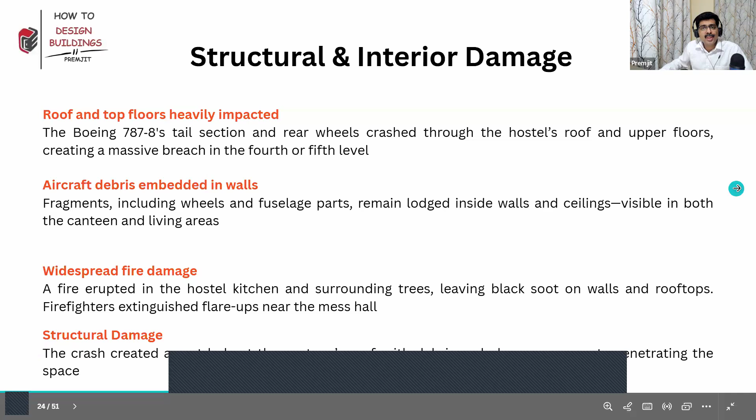There was widespread fire damage, and there were structural damages as well, but there was no disproportionate collapse. Okay. Now, summary is that it was an unfortunate accident. However, building performance was not very bad. There was no disproportionate collapse. Main structural members have not collapsed. There is no total collapse, but crash impact is huge, so walls have collapsed and fire did a lot of damage.

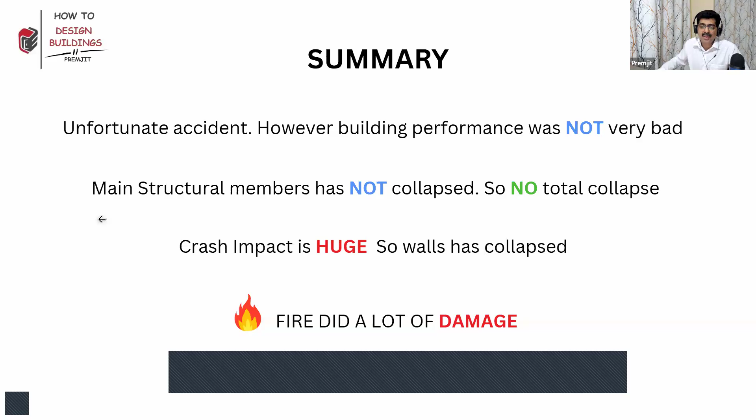Now, what if the flight had knocked off these columns? Then things would have been different. Here you can see that the flight probably crashed onto the roof, and through the roof, since the roof and the wall joint broke, it got stuck inside somewhere here. But what if it had crashed onto the columns? Here you can see columns are damaged, but that may be the wings or some other portion bracing over this. But what if the hit itself was on the columns? Probably the columns would have failed.

So let's see that. Let's also try to simulate that in ETABS and see towards the end what happens. So please stay tuned. I'm going to show you a few things, a few methods on how you can look at disproportionate collapse. You will have to take it forward though.

Before that, let's understand a little bit of history on disproportionate collapse control. Who can tell me the history? Which building collapsed first, which triggered learning or research on disproportionate collapse control? If there is any MTech student here who is wanting to do a thesis, maybe this can be a good topic: how to control disproportionate collapse or progressive collapse.

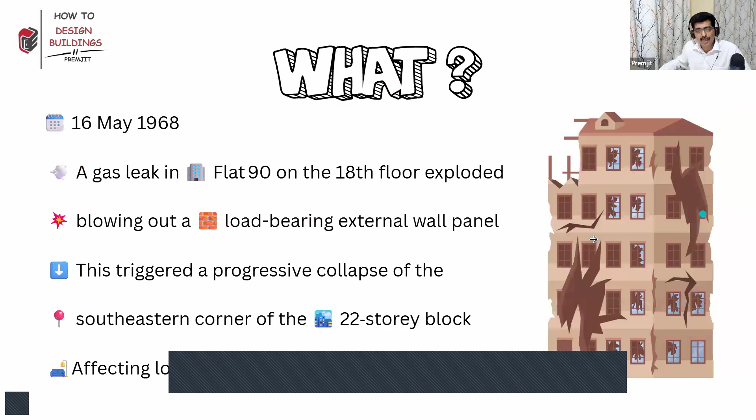See, if you look at this, it progressed, as in the wall crashed onto this first slab, that slab crashed and fell into the next one, that fell into the next one, and so on. So that is progressive, one after the other. Yeah, but a disproportionate collapse need not be always progressive. Say one floor building or only one floor collapsed. Yeah, but then a very large area of the floor collapsed. That is also disproportionate. Okay.

So it can be vertical or horizontal. It need not be like vertically coming down. A big floor horizontally failing is also, I mean, can be disproportionate. Okay. So keep that all in mind. Our idea is to reduce the amount of failure for a small reason. Yeah, if there is a big reason like a flight crashing and the fuel tank blasting, then we cannot do much.

Now, why should we attend to this issue? As I already told you, it results in a larger collapse, loss of life, loss of money, and loss of time. Yeah, so we need to avoid this. That's our idea. The whole idea is that. Okay. Is it relevant to attend to this in India? Definitely yes. Why? Because all this has occurred in India also. Yeah, many times we will not think very much into that. That's a different thing. But then there have been a lot of instances in India as well.

Now, will it be economic to attend to that? Will it be economic if we do a disproportionate collapse control? Many times, yes. Let's discover that by further investigating. That's our idea today. All right. Now, what do you mean by robustness? These all things put together make a building robust. Okay, so now we have to do a risk analysis in order to make a building robust. Let's see how we can do a risk analysis in some time. Okay, it's not a big thing. Yeah, it's only a logical process, nothing more.

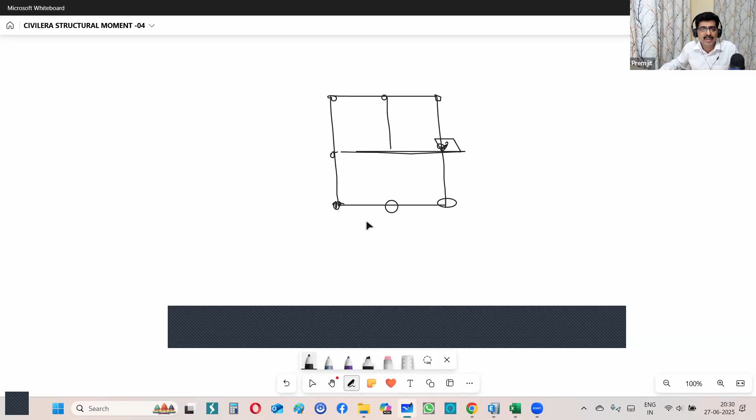And say you decided that, okay, this is not in line. I'm not tying this. And here also I'm not tying. Here I'm giving a beam. This is my scheme. So this column is not tied. This column is slightly off the beam, okay? It's better you have a continuous tie so that you get an alternate load path.

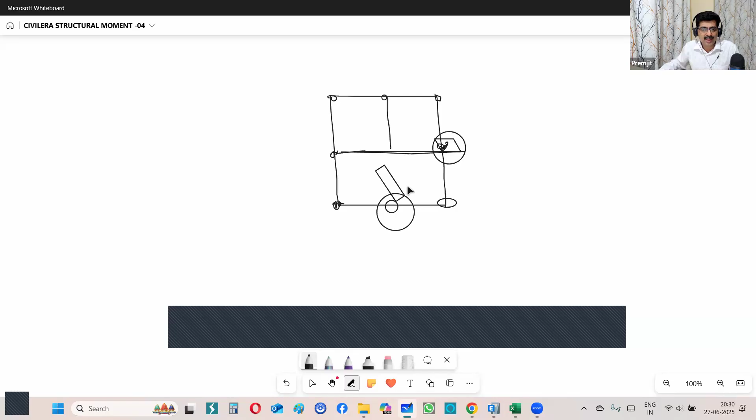Everything should be properly tied so that the sway is less. There is an alternate load path, a possibility of an alternate load path, things like that. So tying columns is very important to achieve robustness. It also gives continuity for the load path. There should be no weak links. Then wherever needed, you need to have more security and safety.

Sometimes you need safety aspects, as in, say, overload. During the construction, there should be no storage. Say you are doing a flat slab and you want to avoid people storing sand or cement bags or something near the column or on the flat slab, because it can be dangerous. It can create shear failure, sudden failure. So there can be many things like that.

So if you are a structural engineer, you should also ensure that these kinds of things do not happen at critical places during construction, even after construction. But after construction, it's not in our hands. But then, as per code, you are required to write down the load that you have considered and what can be done, what cannot be done. Sometimes that's not in your hands, but definitely during construction, you need to have your instructions going.

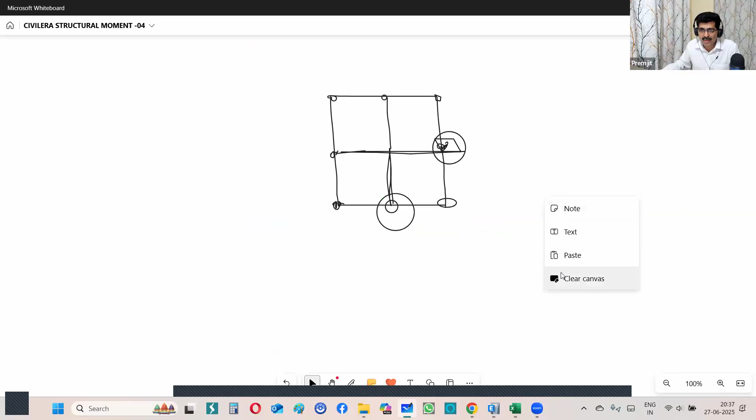Finally we'll do an ETABS check, but right now let's discuss this in a little detail. Or else let's do that right now and then get into more discussions. I'm going to take an ETABS model, a very small model, but then I'm going to tell you the principles. Let me also establish one more point.

Are there any architects or building planners over here who are into planning of your buildings? Architects? Anybody? Say yes if you are. I want to tell you something. Rohan. Okay. Then who is that? Teja. No. Who is that? Narayanan. Okay. Anybody else? Only two. Okay. Harshavardhan says yes. So there are a few planning engineers or architects.

So let me make a plan. My writing pen is not working, so I hope you can treat this as a square. Now say that you have a building, say a 10-floor building, and this is only 6 meters. And I have a column here, square or circular, whatever, like this. And 6 meters is not something which is impossible.

You can do it. How many of you think that 6-meter spanning beams and four columns around that room is adequate? Say yes if you think it is adequate, say no if you think it's not. Many say yes. 90% of the people are saying yes. I think 100% of those who answered are saying yes. 6 meters. Only 6 meters.

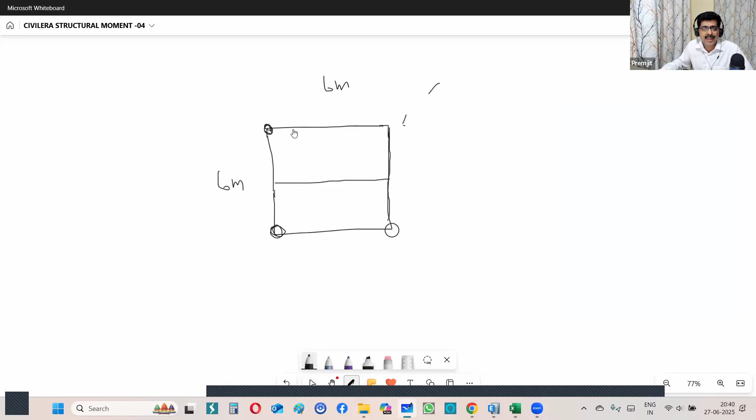But think about a scenario. Say the same kind of flight came and hit this particular column. Or say a truck came and hit it. What happens? You lose one column, correct? One column is gone. Now come all the problems. In a normal case, no problems. An accident, and now you need to have a 6-meter cantilever. A 6-meter cantilever. Will it stand?

Will it stand? Unlikely. Yeah, it is unlikely that it will stand. So more than 50% of this building is going to come down if you do the scheme. Now, like that, you have four key members. It could happen to this, to this, to this, to this. So you have four key elements. Any of that failing, more than 50% of your building is going to collapse progressively. 10 floors are going to come down.

Yes or no? Most likely. Otherwise, there should be some magic happening. If there is an accident, yes, it's going to come down. Now think about this one beam failing. If this beam fails, this beam is also going to fail. If that fails, this slab is going to fail because it's 6 meter by 6 meter. So this beam is also a key member. This beam is also a key member. Probably this beam, not as much. So it's a very critical scheme.

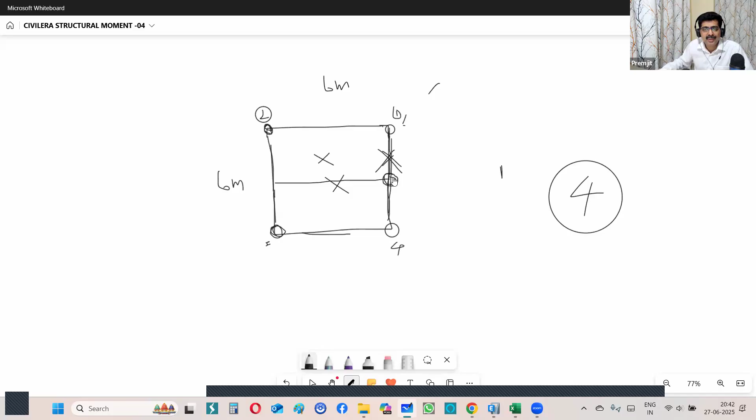Now, if you do this, and if it's an important building, and if you need to control disproportionate collapse, it won't be possible. So as a planner, you need to be sensible enough and sensitive enough to provide a column here. Maybe even here. Maybe even here. Maybe even a beam here.

Now, think about removing one member at a time. Multiple members failing at the same time, we cannot do much. That's not at all in our hands. If all the columns fail, don't ask me that; that's something which we cannot manage. But one at a time, if something happens accidentally, we cannot expect every member to fail in an accident. If that occurs, that's fate. We cannot do much.

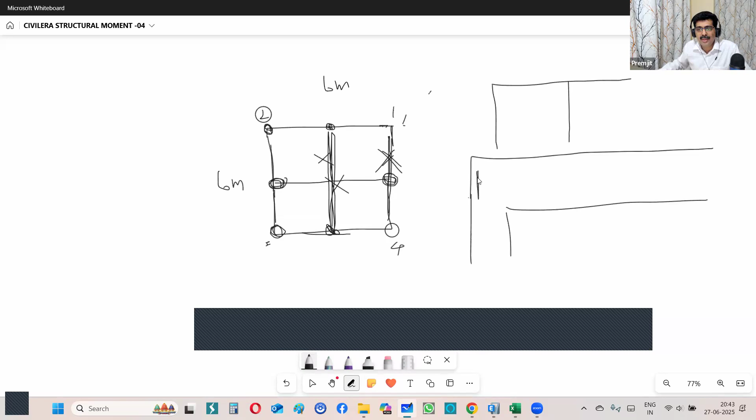So here, now think about one column going off. What is the advantage? This can act as a 3-meter cantilever because you have a column here. Earlier it was 6 meter and without a back anchorage. If you had a beam 6 meter, this needs to bend like this. Probably this rebar cannot; it will be a huge moment. Here you have a back anchorage, one span is there, and then only 3 meter. So the chances of it standing are more. And why will it stand?

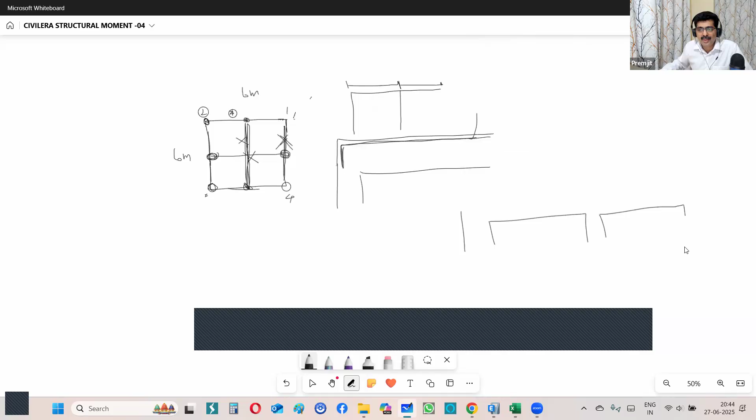Please note, I will show you that in ETABS. This beam or this structure would be designed for earthquake, wind, everything properly. So when you have three columns like this, you would have designed it for earthquake. So you would have had something like this. You have a second layer here, a second layer here, a second layer here.

Now, when this is your detail and this column is failing, this needs to stand only for dead load, live load. Because during an accident, you don't think about earthquake. If that accident is earthquake, that's a different thing. But if that's a plane coming and hitting your column and this column completely failing, don't think about earthquake at the same time.

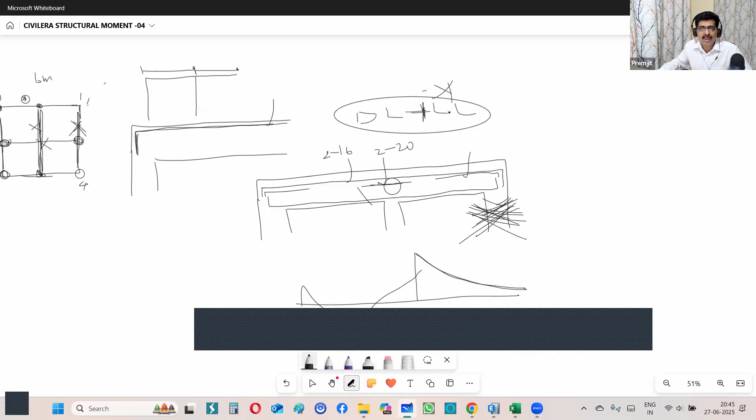So now you have this steel, say 2-16 and say 2-20. Because of earthquake, you had that steel. Now, without earthquake and without factor of safety, only for dead load, live load, this is not needed because this column is not there. So it's going to behave like a cantilever. This steel might be good enough for dead load, live load because you designed this for the dead load plus earthquake multiplied by 1.5 combination. Right now we are looking at dead load plus live load, and this live load would be less also. Full live load would not be there.

So it can cantilever 3 meters. Maybe it will deflect more, no problem. Because our worry is not deflection; our worry is only about people losing life. Not possible to repair, all that is fine. At least people should be able to move out. So it should be possible with a 3 meter cantilever like this. So keep that in mind if you are a planner.

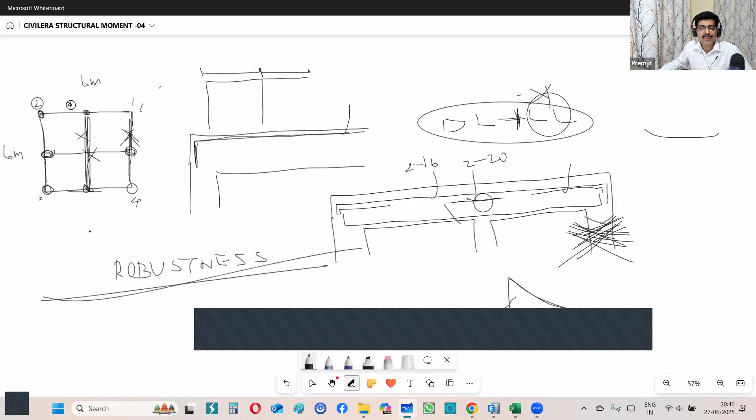Think why structural engineers need it. Just like you say that shape, form, function is all very important for you, robustness is something which is like your insurance. You will feel like, okay, I don't need it, but on that one day, maybe in the life of that building, you would feel: on that day, if I had agreed for one column, maybe that building would not have fallen down. So it's like an insurance for you, so you need to look into it.

So let me quickly show you this in ETABS. Your logic should let you think in this manner. If a beam is removed, how much of slab? See, if this beam is gone, nothing would happen if you have detailed this slab properly, because for an unfactored combination, it can act as a one-way slab. So even if this beam fails, nothing would happen.

But if you had no beams, if it was a 6 meter by 6 meter slab, if one beam fails, it cannot span as a one-way 6 meter. It is unlikely it would stand. So that's why tying more number of members is going to be helpful. Long spans are going to be dangerous. So right now, let me show you this design.

I have done a proper design of this, earthquake, everything. I cannot show you modeling everything right now because our time is limited. So what I'm going to show you is it's all loaded, it's all designed. I'm going to display the design of, say, the seventh floor here. Column design I'm not taking right now. I'm showing you the beam.

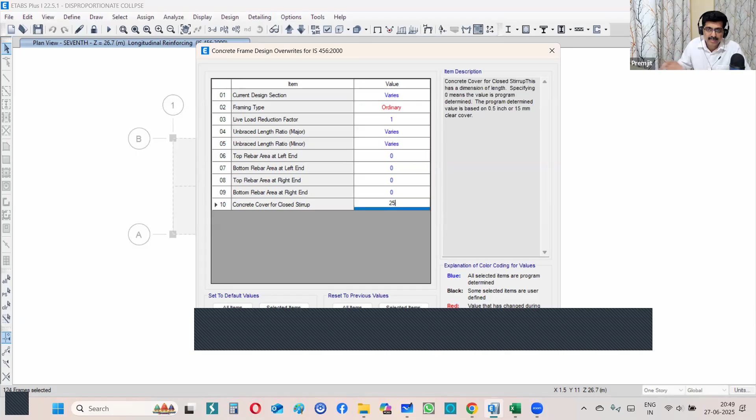Those who don't know ETABS, that's okay. Only the result matters. From the result, you are going to infer and learn something very important. So combination. All the 26 combinations are there. Static analysis I'm doing. Design, concrete frame design, start design check.

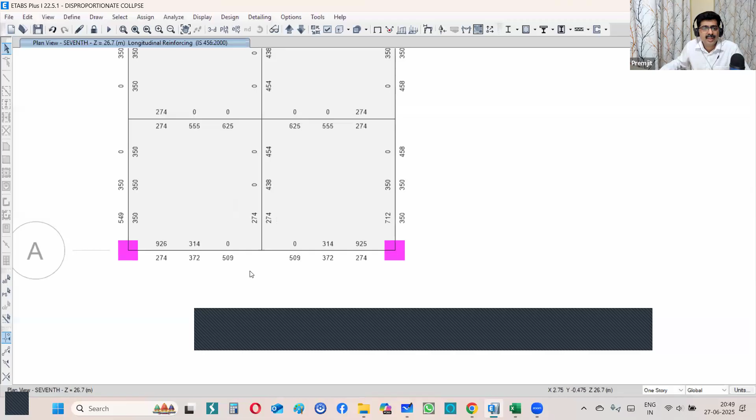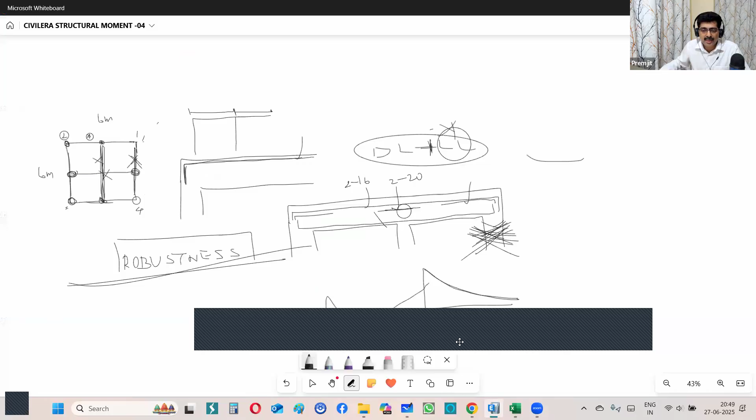Okay. So you can see the steel in this particular beam. There is no third column. I have not given the third column here in this case, only 4 columns. Now, let me take one more ETABS model. So you can see here 925 steel at the top. Here also 926. And at the bottom, you have 509 steel.

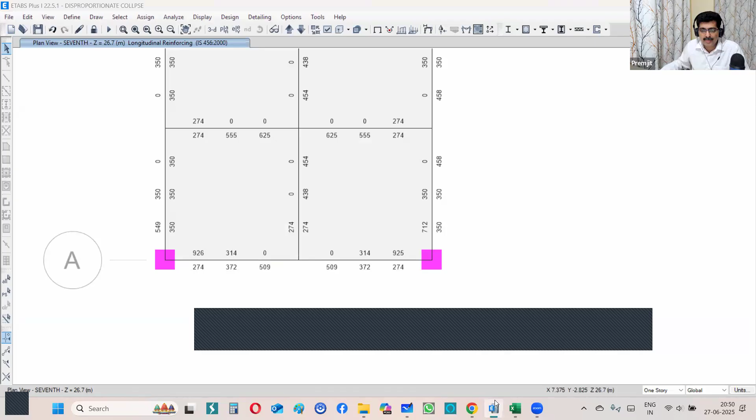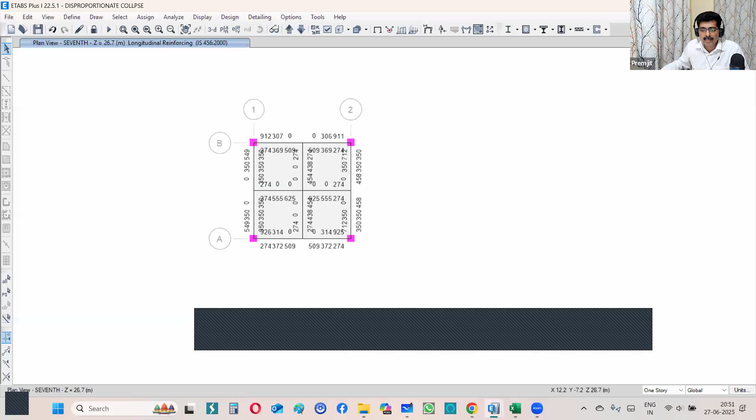Since I've shared it over Zoom, it's taking a little time to open up. Let's wait. I should have opened and kept it. Okay, anyway, it's open now. It's a little slow over the network. Give me a minute.

This is the second model that I'm opening, wherein I have removed one of the columns, just like I told you. I'm going to show you the design after removing that. Give me 1 minute.

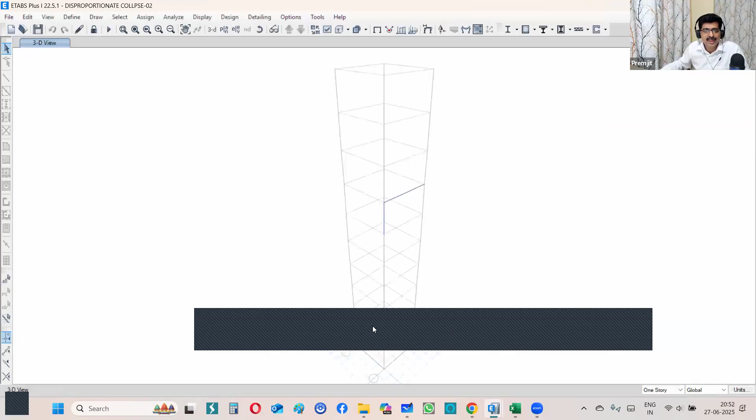So how many of you here are completely new to design? Say yes if you're completely new, first time seeing ETABS and first time doing something of this sort. Let me know how many are beginners when it comes to any of the design. Sachin says, Gauri says yes. Akshit Gaur says flat slab. Okay. Maybe something else. Shivalal says yes.

So let me open the second model. Here you can see in the seventh floor, what I have done is I have removed the column. What you are seeing is a grid. Let me show you that. I have removed that particular column. So in this level, it's kind of floating, and here it should be a cantilever. Let me see if I have designed this. If not, I will design this also. So design, concrete frame design, display design info,

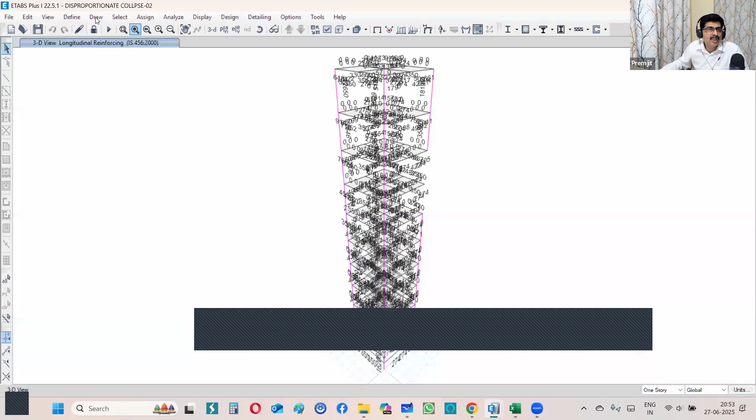design output, and apply. Please note that I have designed this only for dead load, live load. Define load combinations: I have created one combination which has dead load and live load alone. No earthquake, nothing. Even live load I can slightly reduce, because if I have taken 3 or 4 kilonewton per meter square as the live load, generally that much will not come. Code is generally conservative, but I'm not doing it. I have done it for full live load.

So let me come to the seventh floor and show you the steel required. Now see this. Only for dead load, live load, unfactored, you need 2271 steel here if this column goes off.

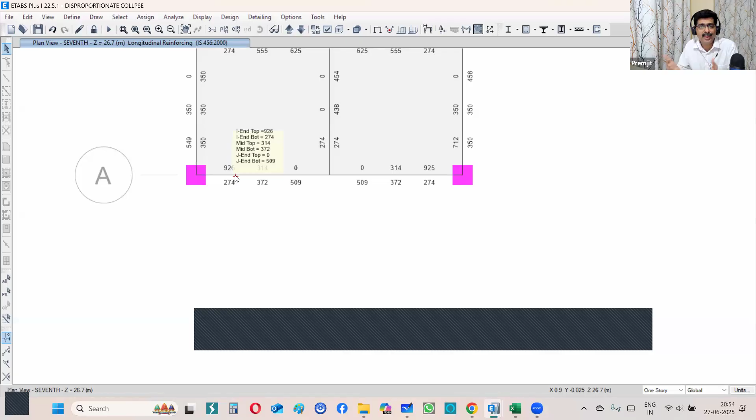Very huge. What was our steel earlier? We had only 926. Now we need more than double that. I mean, this we need to do before building, okay? Before construction, we have to design this and do it. We cannot do anything after the collapse occurs or during the collapse. Yeah, so this you need to attend in design, which means you have to increase this 926 to what?

2271, which is a huge increase. It will be uneconomic to do that. Sometimes it may not have capacity also to take that. Now, if you give 2271 steel, and if it's a 230 by 600 beam or something, you might have to increase the depth also. And in 2271, if I give 490, that is 25 diameter bar, whose area is 490, I need around 5 numbers. So there will be a lot of congestion here.

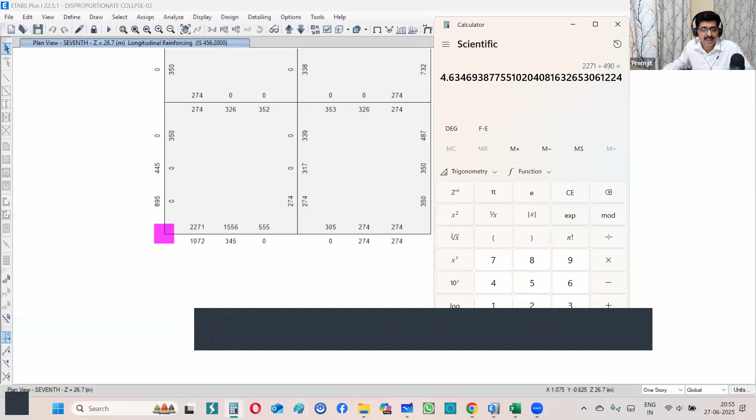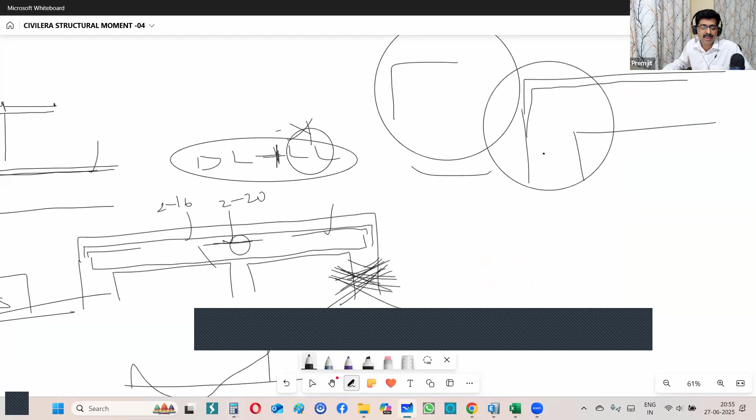And when you have congestion, how can you anchor 5 or 6 numbers of 25 diameter bar into this column? Your turning radius, all that, it's going to be really congested. You have column rebars. It's not something you can practically do. Your cost also will be very high. And you have to do it on all the beams, because maybe this column is going to fail. So this is not looking practical. It's not going to be economic.

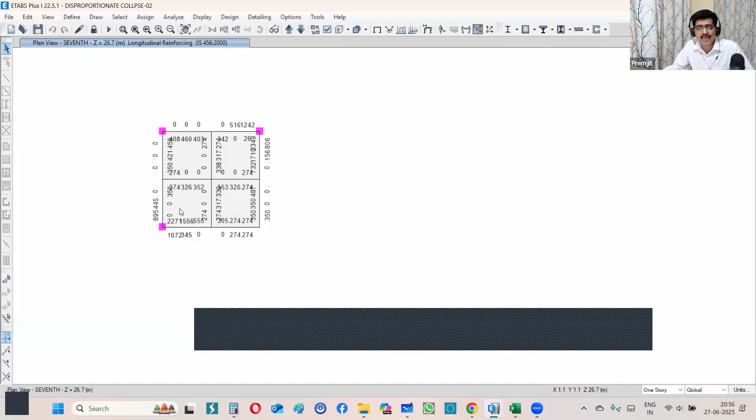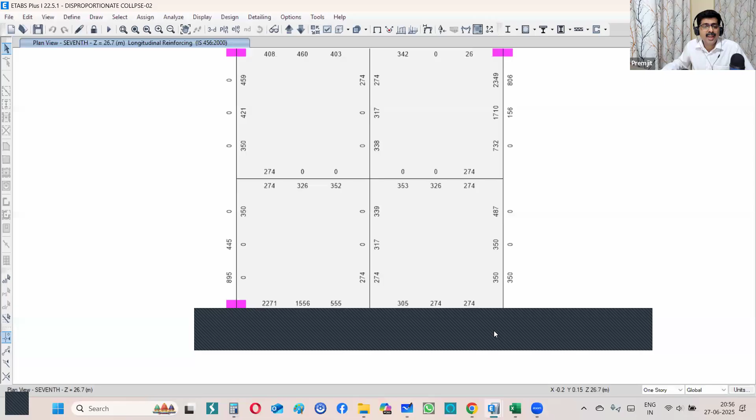Okay, and this is something impossible. Maybe this column is going to fail, or you will have to make the column size also large, steel also large. So it's not going to be economic to do that. That's why scheming is going to be the rescuer. If you have a good scheme, then all of this is going to be easily possible. I am going to show you why the scheme is going to be very, very useful.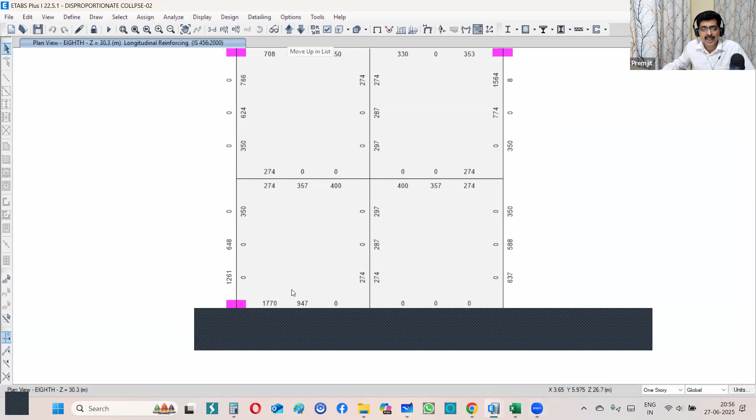So before doing that, let me show you one more thing, the upper level. Here you can see, here also it's a cantilever. In the lower level, it is not a cantilever. You can see the steel is very less because you have a column on either side, and you are designing it for only dead load, live load. Here it's a pure cantilever, the steel is high. And in the upper level, you were expecting it to have even more. Why? Because there is also a point load here.

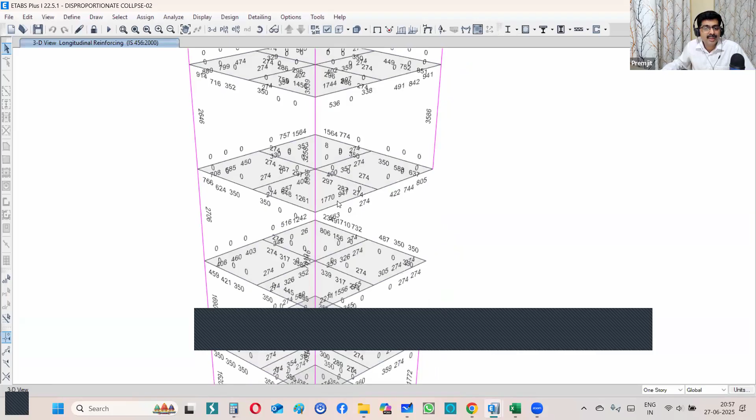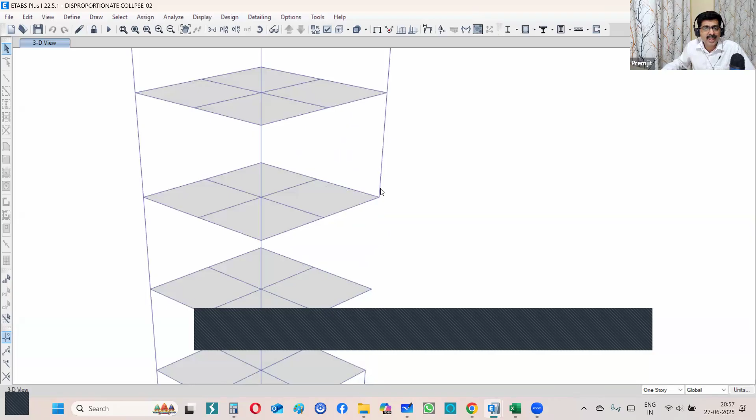A floating column. But maybe it is slightly less. Why? That's where all your connection detailing will help in some alternate load path. Probably this is acting like a suspender. So you need to ensure that this column has tensile capacity. In your normal design, you would only look at its compressive capacity. Even if you look at its bending moment diagram, let's see. I'm not sure. Let's see.

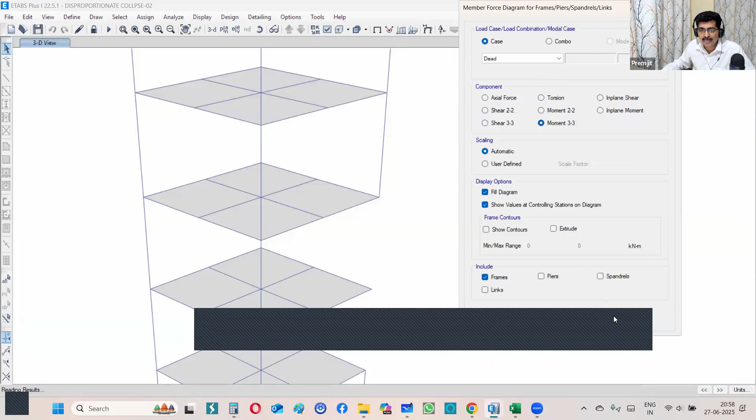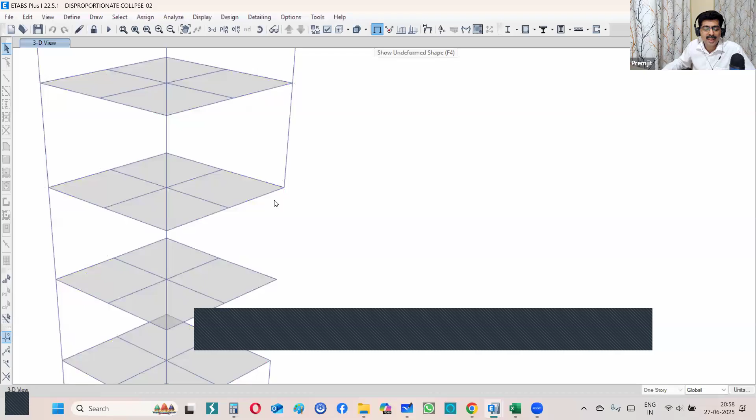See, here it's a pure cantilever. You can see the cantilever moment, whereas here you can see something else. So it becomes very important that you attend this in your analysis and design, and also consider this fact. Maybe your terrace has some larger beam. Maybe the load was less in the terrace and you thought, okay, let me standardize everything for one beam. Let me not reduce its depth and steel.

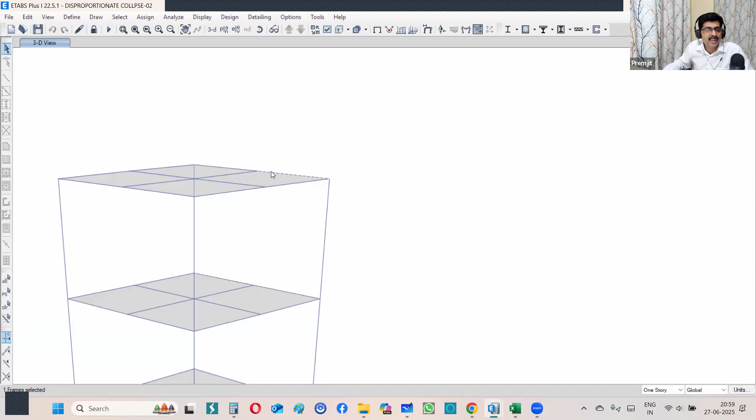Let me give the same steel and the same depth, whatever we have here. Maybe tomorrow there can be a water tank coming over here. Today it's not there. So let me give the same design here, even here. Which means that this beam has more capacity than actual. So instead of this being a floating column, it can act as a suspender from this particular beam, provided you have one more column here and things like that.

So maybe this beam can act as a small cantilever and this column can act as a suspender and help in suspending this particular floor. So this may not collapse, because we have designed it for earthquake and we are now considering only dead load. We have only dead load, live load, or maybe dead load alone.

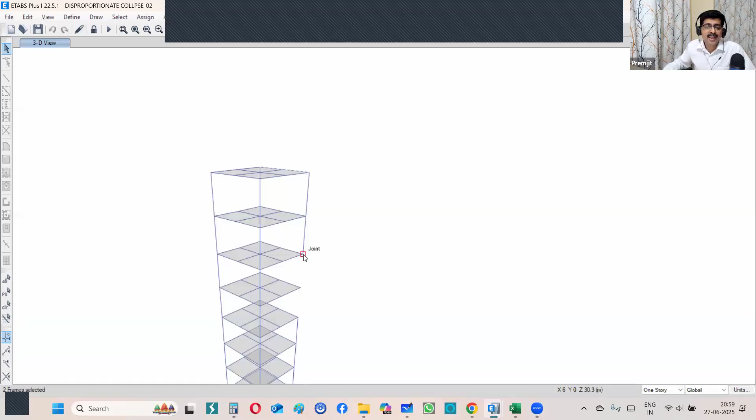Live load may not be significant. Yeah, so this will save your building, but then you should have ensured that your steel are through and through without much laps. And if ever there is a lap, you have tension lap in your column rebars and things like that. And this connection, this joint is properly done. Normal detailing, correctly done with correct LD and all that. If you have ensured, this can act as a suspender also.

So what felt like a floating column for you in the event of an accident is acting as a suspender. We never know. So that kind of redundancies you need to establish during your design. That is what a good engineer should do. And if you do that, clients will value that. And that's how you add value to a project. You need to demonstrate that. You need to tell them, this is what I can give you and this is why I'm charging you more.

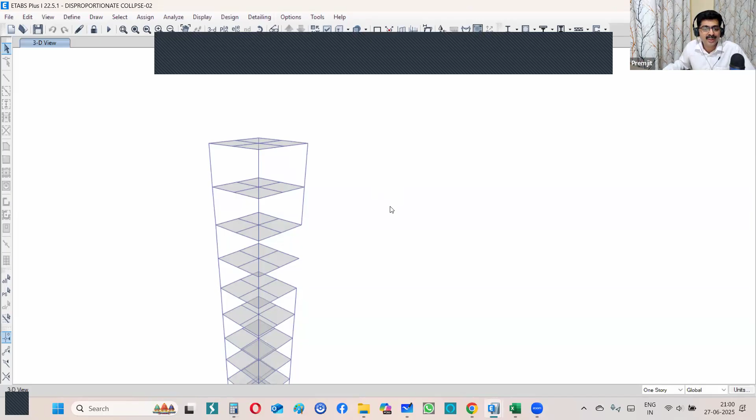Otherwise, you will end up charging 2 rupees per square feet or 3 rupees per square feet or whatever is prevailing in the market. So everything you should add value. And for these projects which are sensitive to disproportionate collapse, it's worth that. So you need to convince your client and make him aware of such things, practices, and possibilities. Don't think that everybody wants. Our main problem is that we assume too many things that everybody wants.

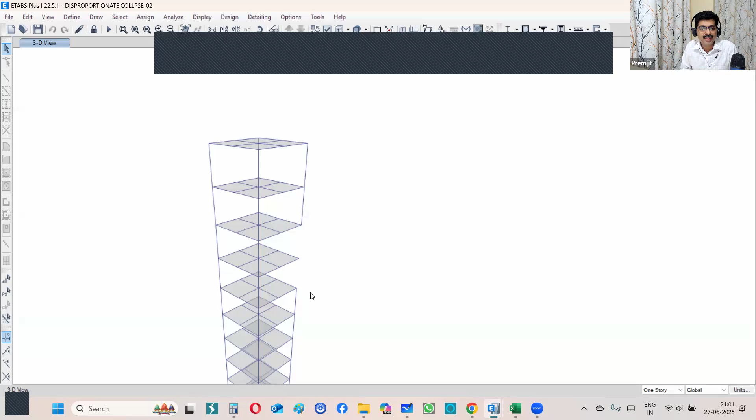I have heard people saying, hey, architects will always object columns. I have seen many architects who are receptive of these ideas. Same way with clients. So your success lies in identifying that kind of architects and clients who are valuing all these, and don't assume everybody are alike. It's not that. Okay. So that's one point I wanted to tell you.

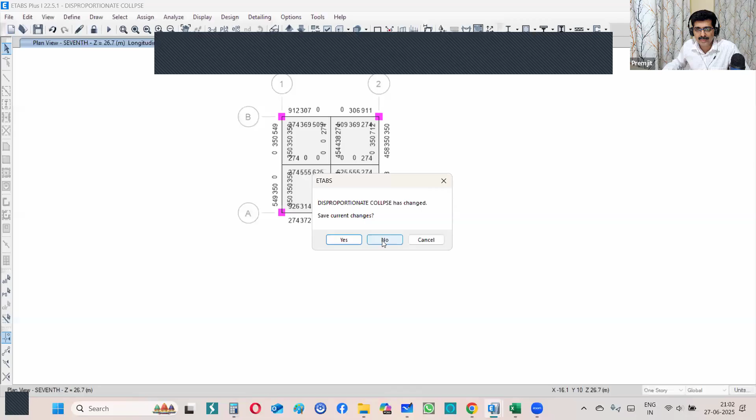Now, let me take the other model as well. So I'm done with this. I'm taking another model now. Give me a second. It's taking a little time.

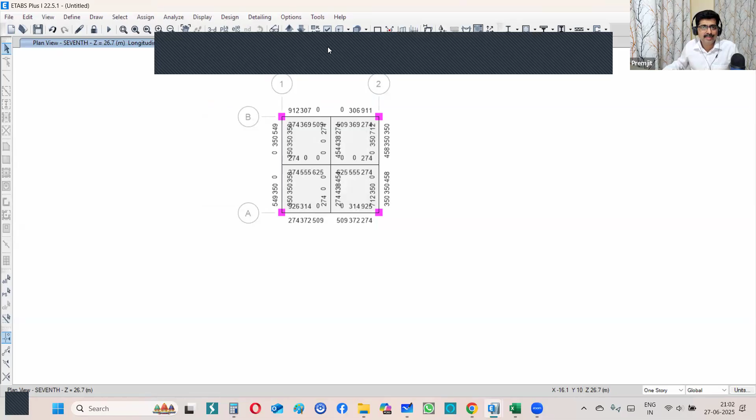So I think the name of that was this one. Okay, so here what I have done differently is I have kept one additional column. So let me take that particular plan. Only thing I have done is I have added one column, not here, in one location. Actually, here also adding is better, but you can test that later. So I have added one column here. So let me design it. I think I have designed it. Let's see. If not, I will design it again.

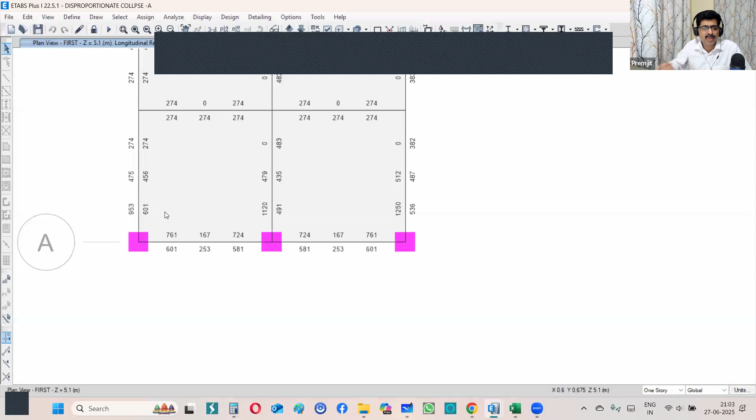So here now you can see that the requirement of this is 761. And this is done with all earthquake analysis. Everything is done. And you are getting this kind of steel here. I think the seismic zone I changed in this. I'm not exactly remembering. Anyway, now let me change and take another model where I have 3 columns and a collapse. Give me a second. It's taking again a time. I think this was the model.

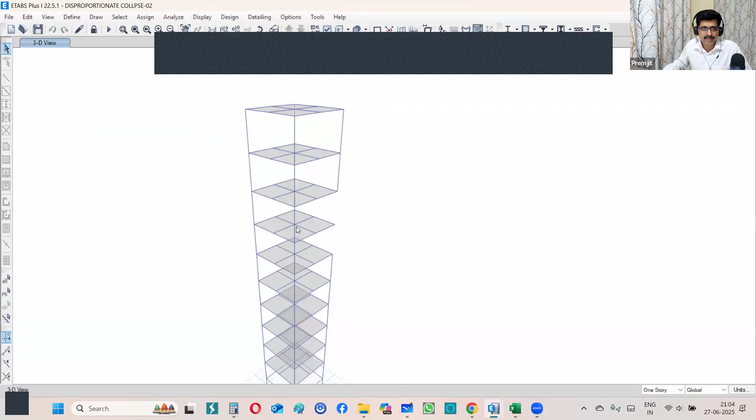Let me switch off the grid so that it's clear. What I did here is I took off the entire one column here. That is the case that we discussed. I took out one column. Completely I removed. All floors I removed. It could be that it's gone in only one floor like the earlier case. It could be that it goes off in 2 floors. It could be that all the floors went off.

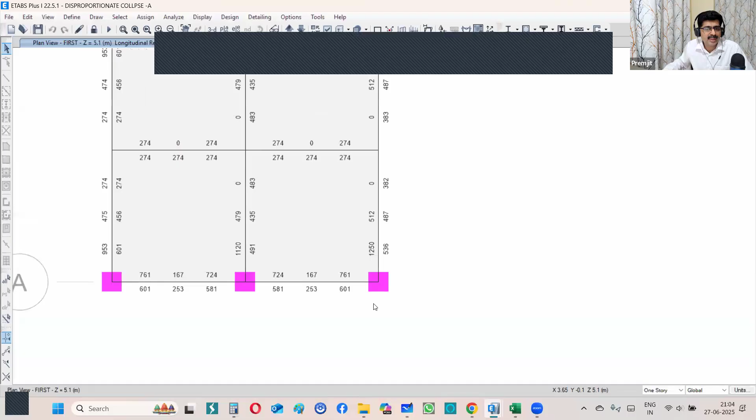So let's take it like this. All the floors went off. And maybe we will consider first floor, not seventh in this case. First floor still, let us see. Now here also, let me take the first floor.

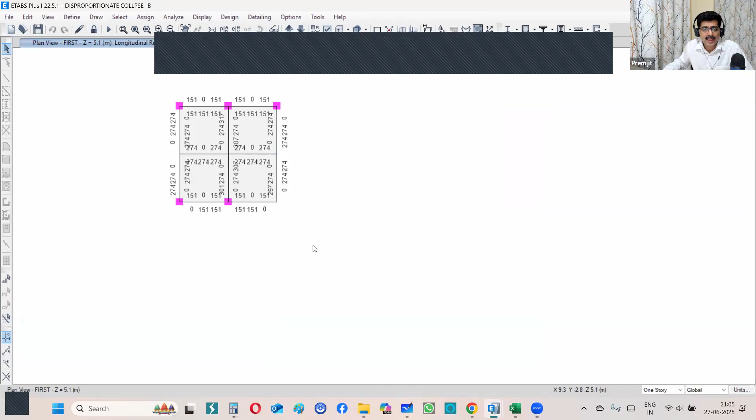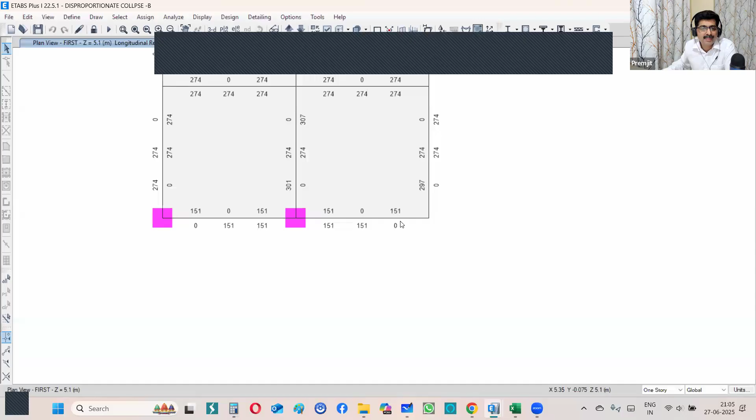Okay. Let me display design, concrete frame design, display design info, and total long steel. Okay, so see this. What you can see here is a beauty, structurally. Why? Because dead load, live load is giving you a steel of 151; 212 will suffice for this cantilever, 3-meter cantilever.

Okay. And what we have is much higher. 274 you have, because you have done this for zone 3 seismic design, which has resulted in 274 steel. Even if this column is gone, it can cantilever across. That's what you are seeing here. So without 1 rupee increase in your cost, your building is going to stand.

It's not going to disproportionately collapse, even if this column completely goes off. Yeah, if that column falls and injures people, all that will be there. I'm not saying that everything will be perfect, but then a complete collapse of your building is not likely to occur.

Okay, sometimes you may have to slightly increase. It's a small cantilever with respect to the earthquake design. That's why its steel is so less. Okay, but then sometimes minor increase you might have to do. Sometimes minor extension of rebars you might have to do. Okay, that kind of scenarios might occur, but it's not going to be a huge cost increment.

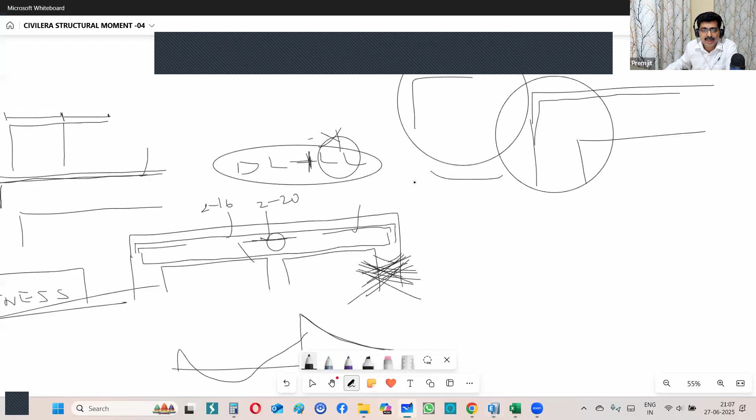Okay, say for example, let's take another example. I'm not going to do it in ETABS right now because it takes time. Say this column fails. Okay, this column is going to fail. Now, before doing that, let's sketch the rebar detail of this particular beam. Let me clear the canvas. You have two spans. Okay, your detail is likely to be like this. 212 is going to be through.

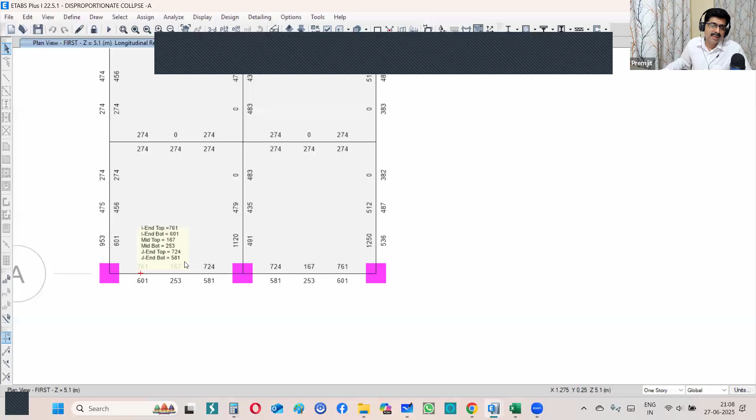Okay, now I'm not writing the reinforcement and all that. You can infer from this. Say you can convert 761 into equivalent steel. Yeah, 212 plus whatever, 216 plus 216, whatever. You can convert that. I'm not doing it. I'm just telling you the principle. So this is your detail, two layers. Okay. Now the point is this column going off, the central one. It's gone. Say accident happens.

Now the point is, how will be the bending moment in your real design? It would be something like this. Those who are new to bending moments, or who have forgotten it, no worries. You can polish your skills and learn it if you are keen. But anyways, this is going to be the approximate. These values might be different or same depending upon various parameters.

And after that collapse, what would be, say, if this column is not going to be there, it will be something like this. Okay. So whatever was a support here, we had top steel more here. You are now required to have this steel more. Why? Because this column is not existing.

Yeah. So during your analysis, before freezing your design, you should check this. Say this is a key member you are identifying. So when you are removing this particular column, during your analysis, before freezing your drawings, you would get this moment here. You would get a little more moment here, maybe less. Why? Because here this check is done only for dead load, live load.

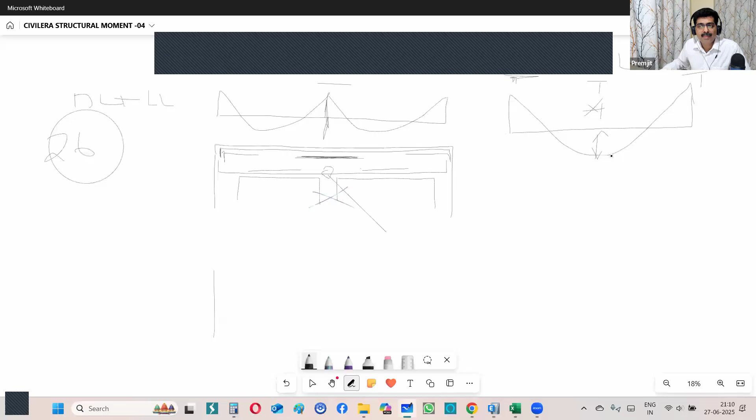This is for everything, dead load plus live load plus earthquake, 26 combinations we have. Yeah, wind, everything is covered. So this steel is likely to be more, whereas this steel is likely to be not so much. Even though this column goes and the bending moment becomes like this, the total steel might be still less. But you might end up having a requirement, say you detail it like 212 and 216.

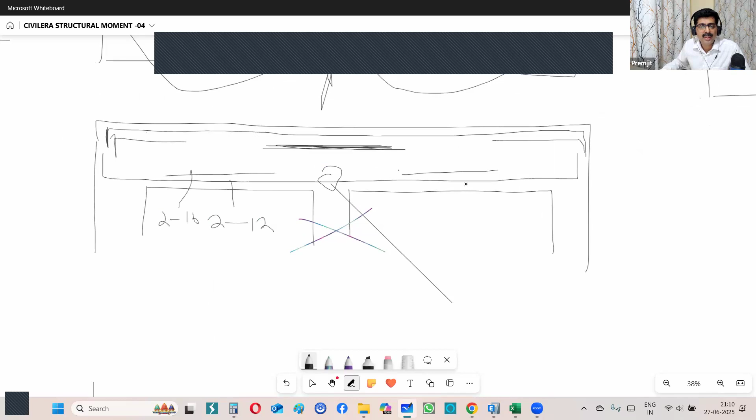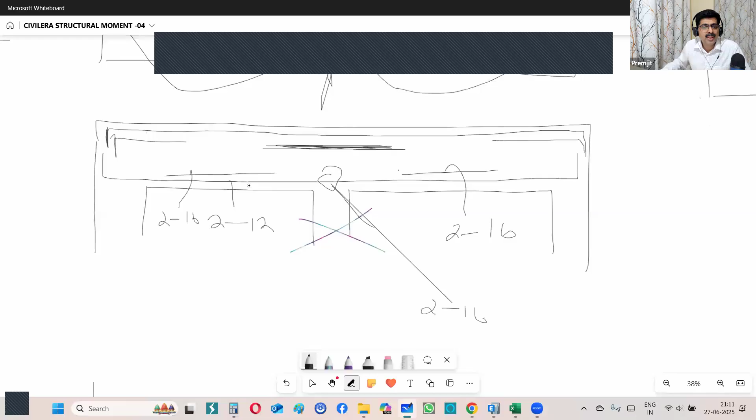Okay, the best method is first layer larger diameter, but say you have detailed it like this, maybe you have to do one tweak, that is swapping the layers. Here you may have to give 216 and second layer 212. Swap first layer and second layer, so that when the collapse occurs, this moment that 216 can take care. You need to check that. If that is not adequate, then you have to extend this.

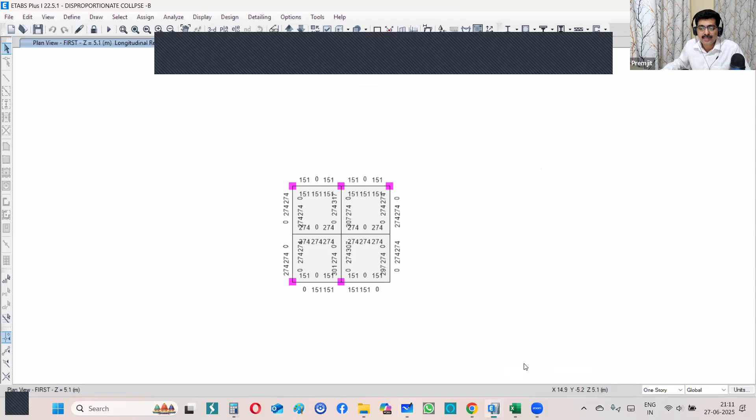So this adjustment, and 99% of the cases, in this case you are seeing it yourself. Without doing anything, your structure will stand as a cantilever. Even if you remove this column and check, it would stand, without any increase in steel, because you have considerable steel. But in that beam, in certain cases, you may have to slightly do this tweak. Maybe you have to extend a rebar, maybe you have to swap your layers.

So even if you have to do that, the cost associated might be very, very less. You might spend a little more, but not so much. And that small additional spending is justifiable because you are going to save your building from a very disastrous collapse on an accidental day. So it makes sense to do it. Yes or no? Say yes if you feel that it's important, and a very minor cost increase is okay for achieving a lot of robustness. Say no if you believe it's not needed.

Okay, so many are feeling yes, that's great news. Yeah, because engineering should improve, and this is the way that we can improve engineering. All right. Okay, so how many of you think that as a site engineer also, if you know this, that's going to help you to take decisions?

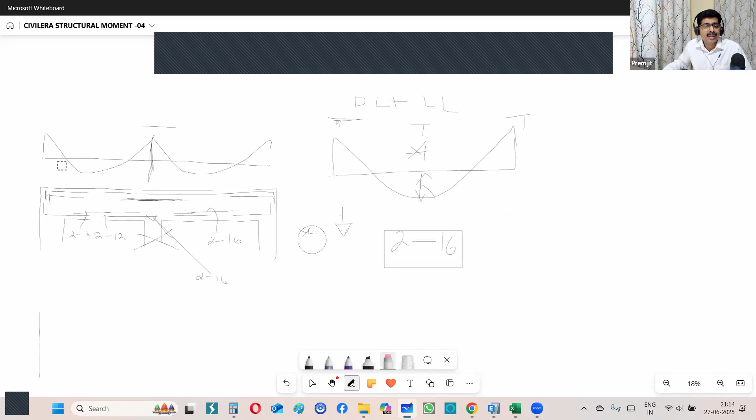So you don't need to know the entire structural design in order to add value to a project, but you need to know a few things at least. So rather than doing a supervisory role alone at site, you can take decisions, you can appreciate things, you can add value to things if you are a structural engineer. And site engineering is nothing but application of structures with respect to bar detailing. Other aspects like finishes supervision are different things, not related to structures much. Otherwise, all these are application of structural engineering.

So a structural engineer should know site engineering also, because then only he knows how your design can be buildable. If your designs are not buildable, then that's not useful at site. All that you get to know if you are a good site engineer. Same way a site engineer should be a structural engineer as well. May not be everything, but it's good to know a few things at least. And for larger projects, there will be a lot of site decisions that you need to take. You cannot always call back a structural engineer and keep asking things. So a site engineer will be a structural engineer as well.

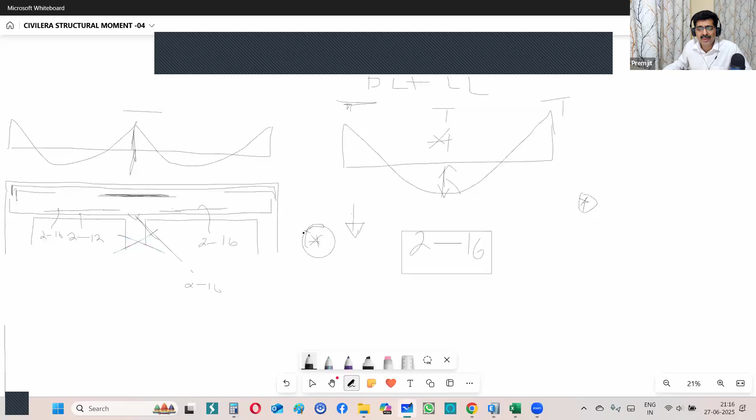Victor is saying a lot of structural engineers will not allow changes to their designs. The point is, they know that probably you don't know much, so their egos might be speaking. But if it's for the betterment of the project, I am always open, and there are many more engineers who are open to changes. So don't take a blanket decision that all structural engineers are non-receptive. It's not like that. And if you know things, you will be able to give better suggestions to others. There is nothing wrong if you correct some mistakes. Okay, so that's about the robustness part.

Now coming back to the discussions. The ETABS check I showed you, and I hope you liked it as well. So our inference is that if we have seismic resistance, then achieving disproportionate collapse resistance is not a difficult thing to do. And there are many more margins and things which I have not told you. But basically, if you design properly, you are able to meet disproportionate collapse control. So the point is, without your knowledge, so many things are happening behind the scenes. If you know it, you will appreciate it like this.

If you don't know it, things are occurring without your knowledge. Alternate load path comes into play. Margin in the load comes into play. Alternate load path, suspender action, all this keeps on occurring without your knowledge. Only that you don't know. Even some structural engineers, I mean, some of you are juniors.

Even I didn't know all these when I was a junior or when I was starting off. So nothing wrong about that. But what I'm trying to say is, if you don't know about these, you don't know that, but it's going to occur at site. And your building is going to have that alternate load path. And this is one of the reasons.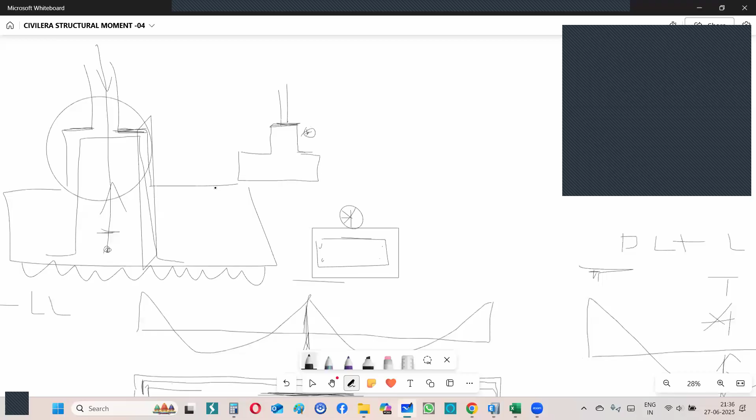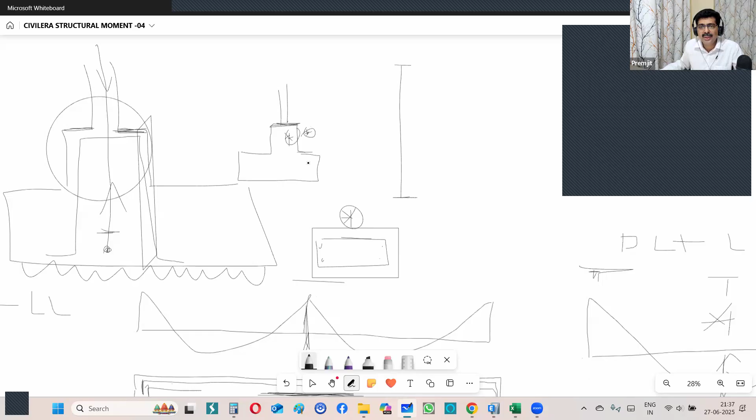Yes, the only difference is the nominal reinforcement, that is 0.8% for column and 0.15% in IS 456 for pedestals. Correct. Yes, you have to design it for whatever moments, shear force and compression coming in, in the same way. When it comes to a column, you have slenderness, eccentricity, minimum eccentricity, and things like that. That's not applicable. The slenderness moments and all that are not applicable for this. That is something which you already know.

So basically, to summarize, the definition only makes a difference for the ratio. That's it, sir. Yeah. So these kinds of pedestals you can design like what you see in your textbooks. When you have your column, you need to analyze it and understand its sway. Based on that, as I explained in the course, you need to look at the fixity length. Your effective length will change based on your Q value and all that. Those kinds of things will not come for this pedestal. Understood, sir. Thank you so much.